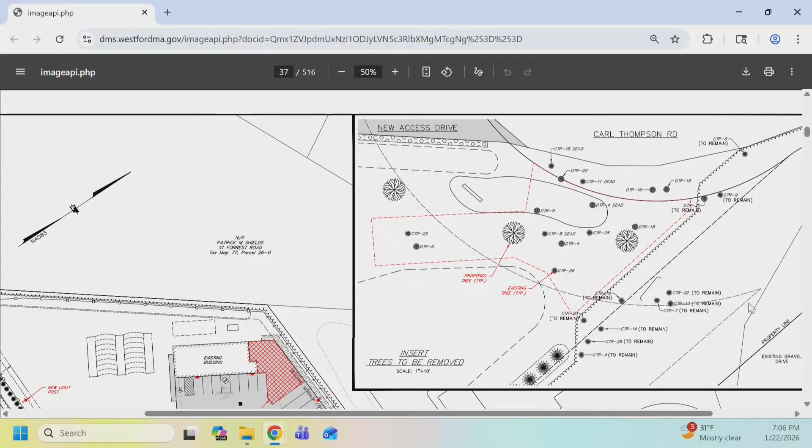The paving, that's just around the building, was more kind of cleanup. We were trying to minimize, being engineers, drawing straight lines, and Sean looked at it and felt that since we were going to have this pavement, he wanted a cleaner site around the building. The parking hasn't changed—the configuration of the line work is what we presented to the board for approval back in December, with parking spaces and how those are utilized. It would just be filling in some of the gaps with paving and gravel, trying to have a somewhat cleaner site around the building.

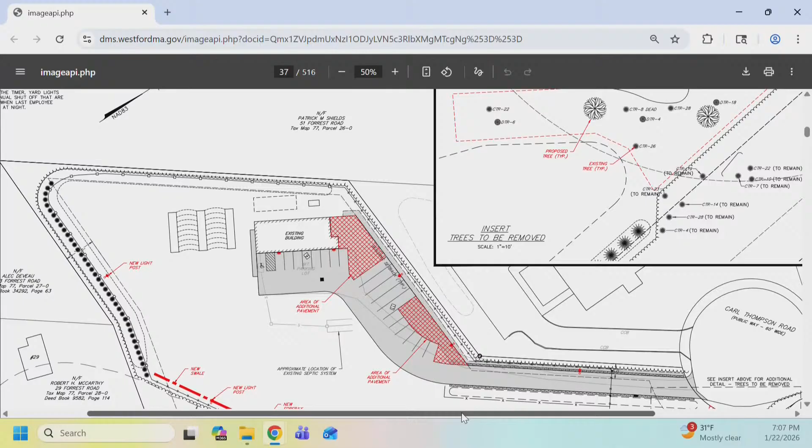The entrance gate—this is really, it was further to the left. If you're looking in the middle where Joe's pointer is going, up the entrance road, that gate used to be about 50 feet to the left, right there. It just shifts to the right, and that gives them the ability to have more yard area inside that gate. It doesn't change the traffic flow—there's still enough room for a vehicle to come off Carl Thompson.

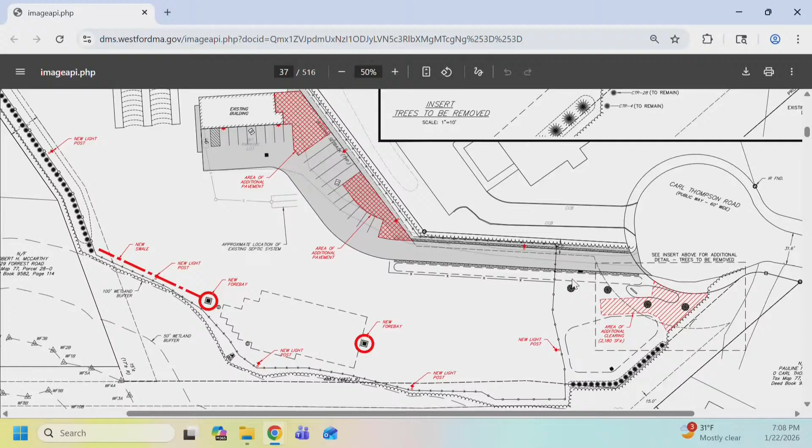There'll be a kiosk. It also lined up the fencing with the automatic slide gate, which was an improvement. Before, the slide gate would go out to kind of an exposed area, and now that gate lines up with the existing fence, which is a better design—it helps protect the gate when it's open so people aren't crashing into it and breaking it.

And lastly, as the chair said, the lighting. Joe, if you want to go to the lighting plan—there was some additional thought, especially once the dark nights set in and Sean started to realize how dark the facility is, thinking about operations. The preference was to add some lighting. We tried to keep it consistent with the approved lighting: downward facing, dark-sky friendly LEDs with a smaller spread, fixed below the light fixture.

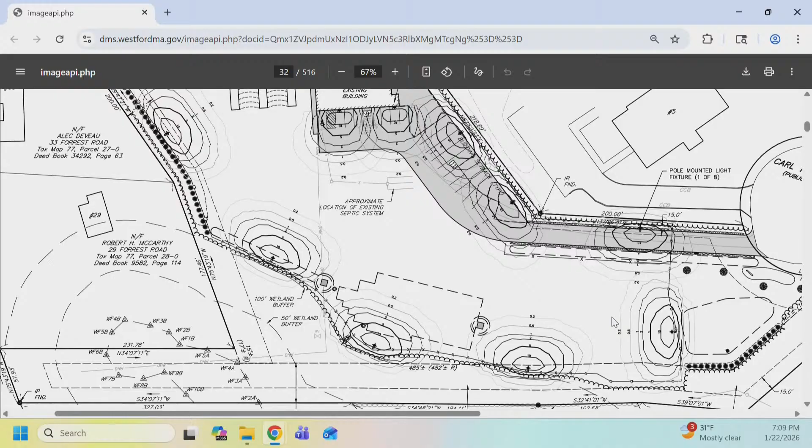You can see there are 5 new egg-shaped, circular lighting contours along that southwesterly limit of clearing—one to the right, and four across the bottom. We tried to keep those spaced out and minimized; we didn't want to put too many, but Sean felt it was important for safety and vehicle movements during that 4 o'clock to 5:30 window, their typical hours.

We also took into account some of the general comments that were raised. All the lighting would be on a timer, only operating from 5:30 a.m. to 8 p.m., Monday through Friday. The automatic timer would shut them off at night at 8 o'clock, but Bob had recommended including a manual shutoff, so if it's not needed, the last person leaving can shut the lights off.

It was a good recommendation. He checked with his electrician, not a problem. They will be able to incorporate that so that we're not leaving the lights on unnecessarily.

They're not there till 8 o'clock, and Sean can certainly talk about his operations. I think the goal was just those occasional nights where they need to have one crew there to load up for the next day, so they do want that option, but typically they are not there that late, so that manual override was a good idea.

The only other comment we had submitted was that we were kind of waiting to get the final review and input from the board before addressing the final engineering comments. We don't have any issues with the engineering comments, and we lightly touched on this at the last meeting, that if the board was to move forward, any approvals include the condition to address the engineering comments. We'd be happy to do that. We have no issues with addressing those comments. It was just a matter of getting through this process first.

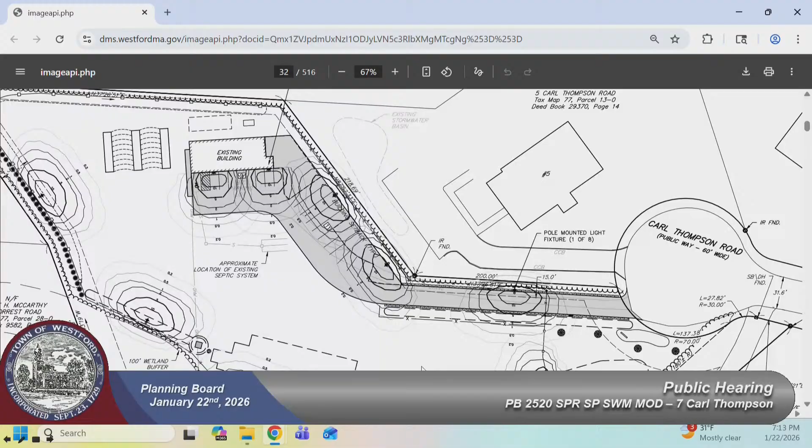And the trees, I appreciate moving the gate to do that, but that is going to open up more of the yard, and those trees are the only buffer right now between the adjacent properties. I was shocked at how close everything really was on that site, between, was it number 5, the adjacent business, the driveway, and the 2 or 3 homes that are shown here.

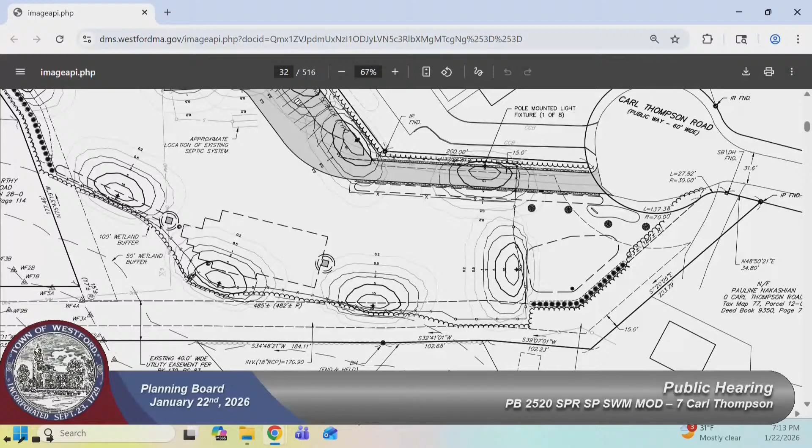So it's going to be really important that the screening be working, and make sure the lights are not too high but have sufficient shades as well. The lights are way set back from the abutters on the side, the house is over here, so there's gonna be a really big front lawn, and the lights are, nothing is facing towards any abutters, it's facing inwards.

As I mentioned last time, it is a small site, and while the closest light will face away, it will be more visible across the site to the adjacent properties. So that all has to be factored in to make sure the aim of the lights is away from all residents, both behind and out in the distance.

So just so I'm clear, those contour lines, that's really where the light's going to go, is that correct? It's the spread of the light in foot candles, the strength and the spread of the light. So obviously the center is brightest, 10-foot candles, and then it goes down to 0.5, 0.2, and 0.1 as you get further from that light fixture. The light fixture is the circle with the crosshairs in the middle of those contours.

What's the planned height for those poles? 14 feet, which allows for a 10-foot pole on a 3 or 4 foot concrete bollard. That's typical for site plans, you have that concrete bollard so cars or vehicles don't hit it.

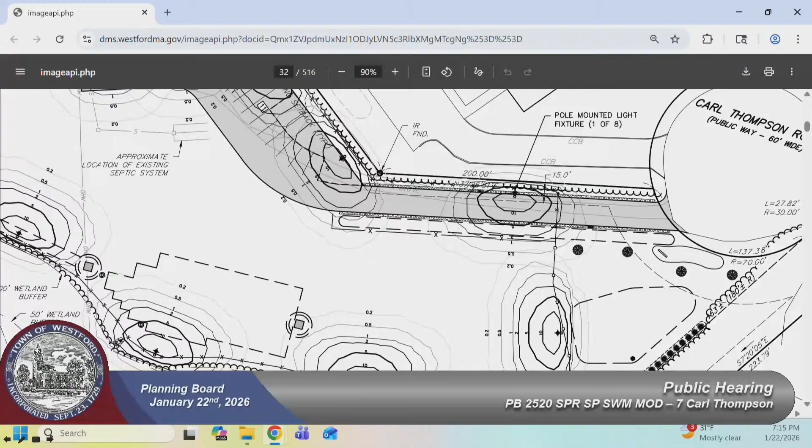Okay, all right, that's John? Okay, so my only question is, you have that really good screening on, let's see, kind of on the easterly side, right there. I guess I was wondering, for that particular light pole, and I know we walked the site, but honestly I don't recall how many of the trees in the tree line are really evergreen.

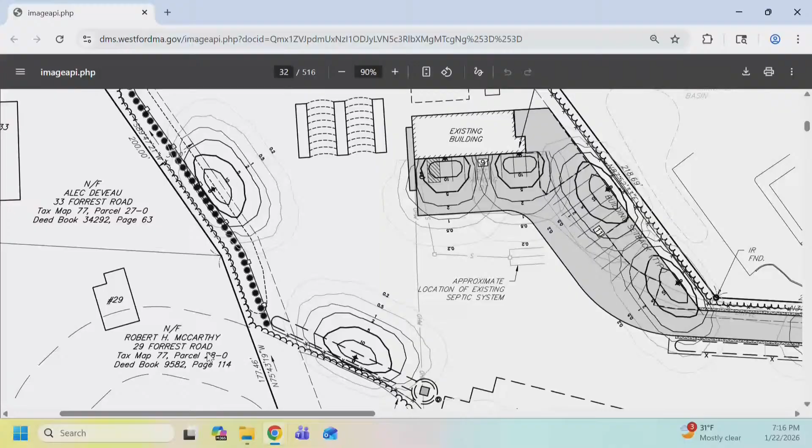If maybe you could get a few more big evergreens in there to kind of buffer, Joe, can you go down a little bit? So you could buffer from number 6, and then the same thing on the other side, buffer from there, so maybe with evergreens you'd get less light, especially at 5:30 in the morning, that's pretty early. I'm just trying to make sure.

No, and I think majority of the trees out there are coniferous, like tall mature pine trees with a mature canopy height of whatever, 60, 70 feet. It is primarily sandy soil where you see those pine species. I know in the past planting something smaller in that canopy, but we could certainly do some sporadic rhododendrons or mountain laurel, that could survive in that shaded area where you could sporadically plant.

Those tend to hold on to their leaves year round, so maybe not an evergreen, but something, or an evergreen, I'm just thinking off the top of my head. Something that's kind of shorter and would fill in those gaps. Yes, that would work too, like rhododendron, we've done that before, so either or, and I know those rhododendrons can get big. Exactly, so we could certainly...

Accommodate that with an updated landscape plan, or we could work with Joe on that. I think it would help fill in some of those gaps. Yeah, if we could just fill some of the gaps a little bit, so that especially at 5:30 in the morning it's a little rough.

Anything else? That's it, thank you. Dylan? Nothing in addition to my colleagues, but we need the applicant to reply to engineering's comments, because there's some stuff in there that warrants discussion, but until we see the applicant's feedback to that, I don't think it makes sense to discuss it. Thanks. Aaron?

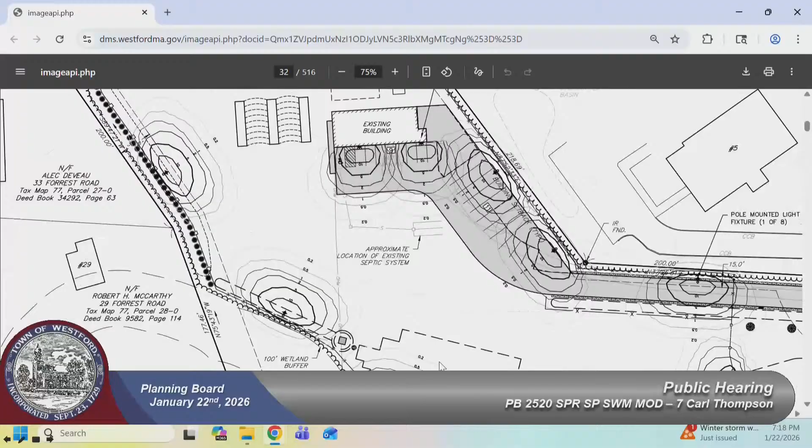What do you think about that? So, I'm trying to think of where you were on there. I'm right behind, exactly behind the existing building, straight up from number 5, I think. Yeah, correct, it would be probably in that area if I had to guess. I think your house is kind of where Joe's scrolling arrow is, and Groton Road is on that northeast side of the plan as we're looking at it.

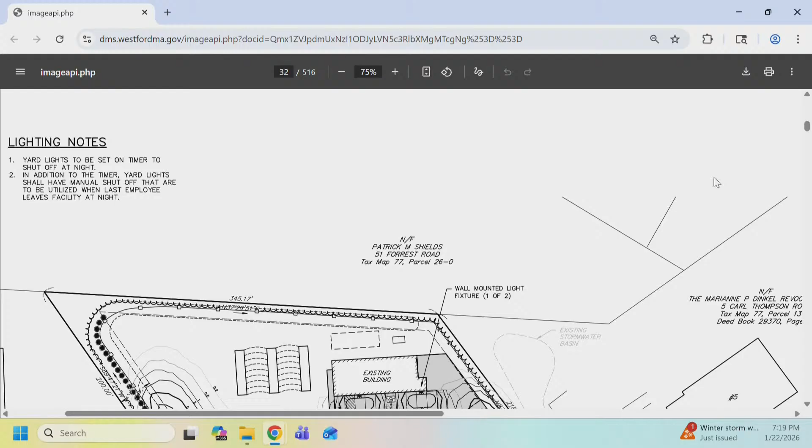All of the lighting that we're talking about adding would be on the south side, and they're all downward facing, dark sky friendly shielded lights, so you won't see the light directly. If I walk in back of my house and walk straight, I'm gonna run right into the back of that building.

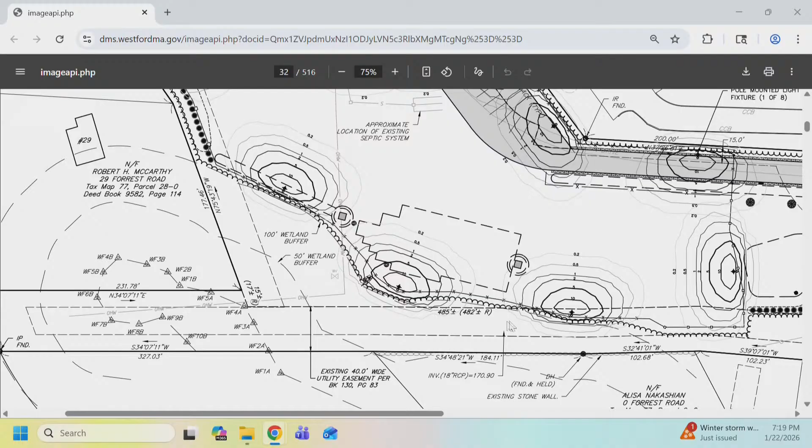So I'm worried about those lights right there, to the right of the building. I don't think there is anything behind the building, but those lights to the left-hand side corner - will those be shining into my house?

They will be facing Groton Road, yes. Those lights are a concern for me, but the intent is that there is a shade on it that limits the throw. That's why I'm asking about the height. It would be 14 feet visible. That's pretty high, isn't it?

It could be much higher. Yeah, it's high enough. Well, that's my concern, so I have to leave it to you people to ease my concern. Are those lights gonna be shining into the back of my house?

So again, sir, if you look at the circles around the light, that shows the intensity. I think if you go out on your back porch, you're probably gonna see a light, but it's not gonna be lighting up your backyard. You should not be able to see the light bulbs, for example.

Yeah, you'll see a light. You should be able to see the light dispersion on the ground and the trees. But we're hoping that there is not a direct line from your line of sight to the light bulb, because the light shade should be preventing that.

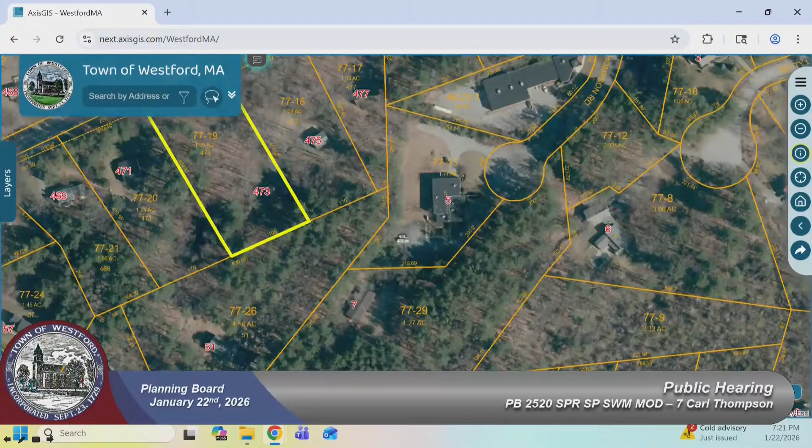Yeah, I think I am too, and I like the idea about the automatic timer, that's great, I appreciate that, and people leaving and shutting the lights off. If that's what's gonna happen consistently, that would be great. But in addition, the automatic timer would take it up to 8 PM every night.

We've asked that they put a manual override on, because in talking with them at the last meeting, 6:30 is probably a typical time for them to leave the yard, and that would turn it off. So the manual override is a safety measure, so it doesn't go any later than that unnecessarily.

I think also that storage corral is gonna be between your house and that light as well, so that's gonna probably block some of that too.

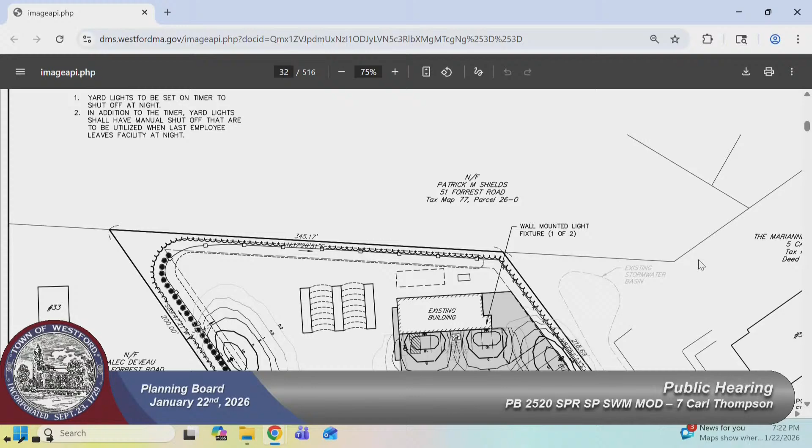Could you go back, Joe, to the lighting plan diagram? So the last ring you see there, the furthest one out from the light pole, is 0.2 foot candles. I looked it up - 0.2 foot candles is apparently the light of a dimly lit hallway or a moonlit night. So in theory, at that distance, it should be as bright as a dimly lit hallway or a moonlit night.

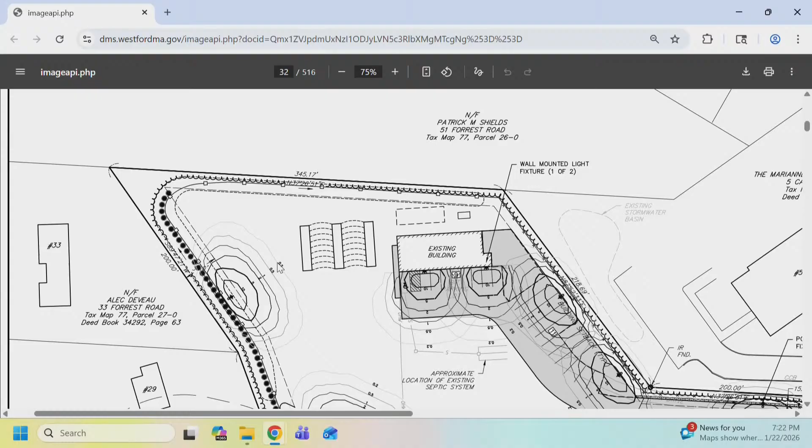So one thing we might want to do is get engineering's opinion on visibility, if they have expertise in that area. I certainly don't think it's something that would be beaming into your house, but I do think you'll obviously see it from your backyard. If you look right at it, you would see it.

What they're gonna see is the bright light at the base of the pole, like a flashlight. It's not gonna spread light illuminating his backyard, but they are going to see bright spots on the ground, depending on their vantage point to the ground.

Okay. All right, thank you. Yep.

Anybody else in the audience?

I have a few questions, if you don't mind. We've been using that back driveway for 34 years nonstop. So I wanted to know, are you envisioning any changes to our using it to get to our garage? No, I'm not envisioning any changes.

I think the site, I don't mean to interrupt, chair do you mind if I respond directly? Please do. We did leave that as to remain, and I think what we talked about with the 2024 approvals was putting in that berm to keep drainage intended to stay in Carl Thompson from going down into your driveway. Very good, thank you for saying all that, because I remember her saying that and just wanted to confirm it. Thank you. So that is still shown on the approved site plan for this project and modification. So there were no changes.

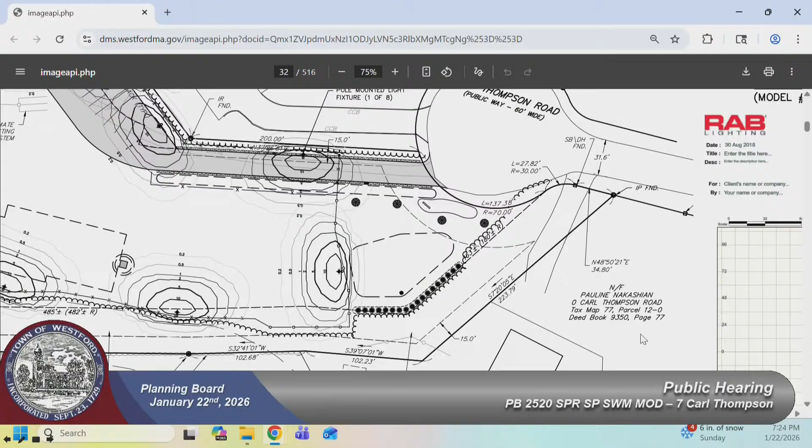Since I'm not an attorney and don't do what you guys do, it's not clear to me how this plan and the other one with the big building from one end to the other coexist. So I don't see that on this map, on these pictures. Am I missing something, or is it here? What was the question? The other large building that's going from one end to the other. That's gone, it's gone.

So we're just doing fences? Yeah. Oh, you guys are great. And we're keeping the existing building there and just rehabbing it. Perfect, it's a lovely building, that garage in there is really nice.

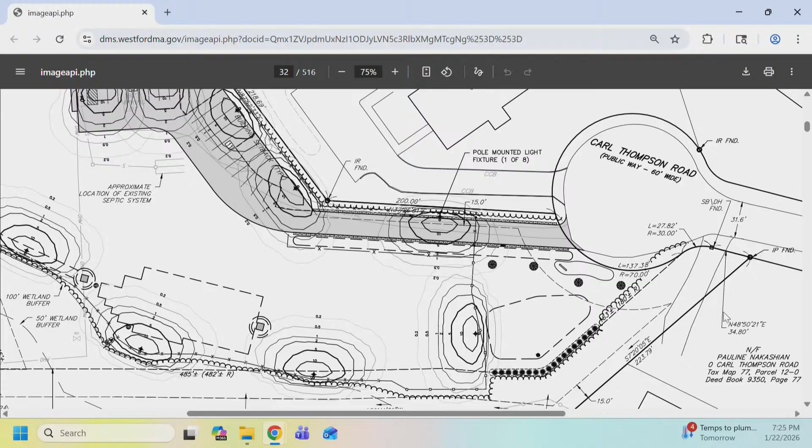Okay, so you're talking about taking out some trees, and I saw some comments in the packet about having to have hearings for trees or whatever. I don't know what side of that berm, looking at the diagram, is on, but there's an awfully tall tree that's pretty close to our garage. If you're gonna be in there doing anything, could we get rid of that? Because I'm always worried about that thing toppling over and taking out our garage.

We could certainly, if the board has no problems with it, and I know Joe has all the hay bales and everything kind of marked, so it's easy to find your way out there right now. We could certainly meet with you and Joe and just mark that tree. We can't touch it because technically it's not on our property, but at the same time, I just look at it and I'm like...

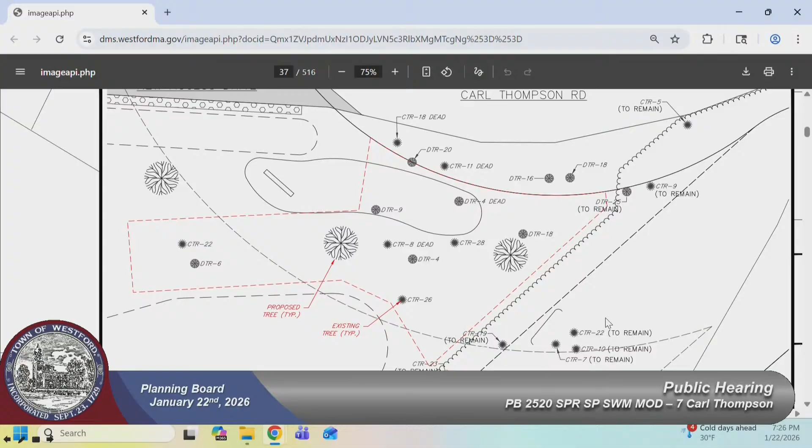Yeah, a lot of those trees fall on that kind of rock berm that's there, that was, I think, put in when they installed the water line. And those trees that you see on that line, where we shifted our tree line, a lot of those fall on that line. So if I had to guess, that tree would be one of them. Let's take a look at it. Okay, alright, that would make me feel better.

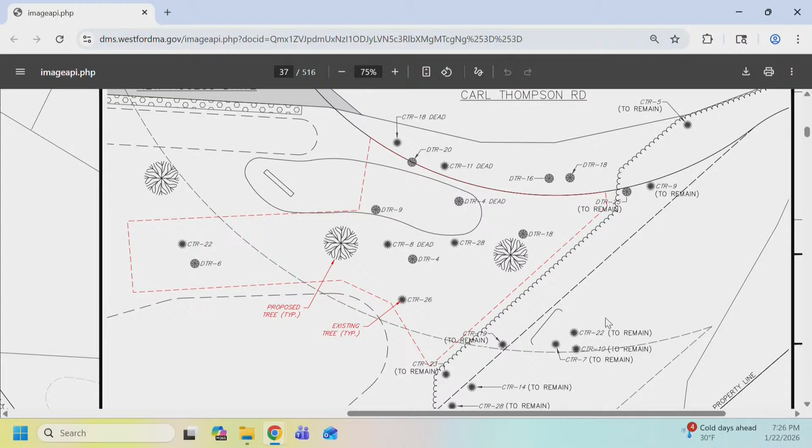Now, so the other plan that was approved, even though that building's not going in, does it still apply or no? Because there's been another one since then. I gotta keep up. Okay, so we talked about arborvitae plantings at that line so there would be coverage in the winter too. Is that still in play? If not, can we make sure it is?

Yep, no, and again chair, if you don't mind, please do. The landscaping plan that was approved for that original larger 25,000 square foot building, all of those elements were kept on this plan or improved upon, not by your property at 6 Betty, but in the southwest corner. There were some additional plantings put in place. And then they're a fence company, so...

You answered the next question I was going to ask, because I don't want to consider just myself, I want to consider my neighbors too. So if you're going to do that, all around you can see those plantings along that westerly end. Excellent, okay. And there's a fence that goes in, and I believe one of the neighbors also just put in a fence, so there'll be a kind of no-touch zone. There'll be a fence, then some plantings, then another fence. Okay.

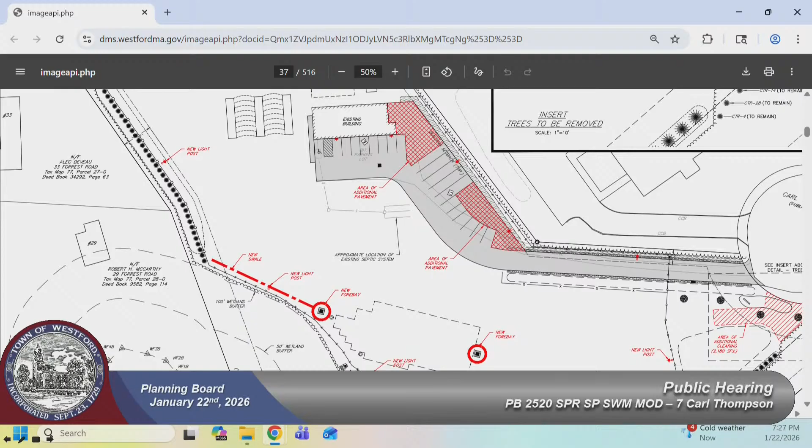Yeah, it's like a demilitarized zone. The squirrels will hang out there, some fox, whatever, deer, that's great.

I apologize, like I said, it's been 30-something years since I've been here and I don't remember. Haystack, didn't Westford ever have intention to keep lighting down low so it wouldn't impact them up there? Am I wrong about that?

We have a gentleman's agreement between the town and MIT Haystack to limit light pollution. That's always been a factor in our master plan for, I don't know, 20-plus years that I've been involved with. That's been a factor in every development in terms of using shading that throws the light downward as opposed to allowing it to go skyward.

I see, this is the lighting that we've been requesting people to use. So the reason why I ask is the other business that's on Carl Thompson, he's been a wonderful neighbor, worked with us and everything. But the lights went up and it beams right into my daughter's window.

It was awful. And he said, I don't get it, we spent money on purpose to make sure it wouldn't be a problem, and yet they go on at night and the bedroom lights up. It's awful. And we're talking like 200-300 feet away, it's a ways.

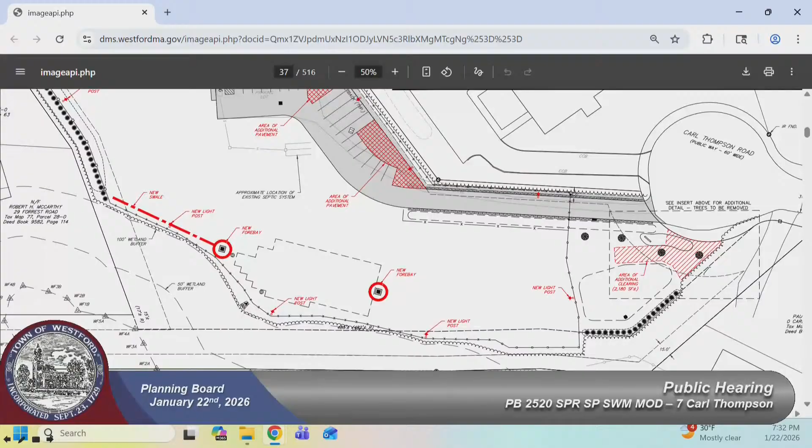So I did show that because I knew that was one of his critical path comments. You can see it on this plan, that red line - that's the grass swale. We didn't address all of the engineering comments, so they were going to wait until all of them were addressed. So we did address that on the plan by showing that we would be incorporating that swale back into the plan, and that is provided in this plan set.

I did talk to them and they were appreciative of that, but then they had more questions about what was done and what wasn't done on their comment letter.

I guess my question, Mr. Chair, is that there's still back and forth between the applicant and engineering. Do we want to close this fully, or do we want to see the back and forth and the resolution of engineering's comments before we close?

If I could make a suggestion - we could always draft a decision for your next meeting in a week and a half. That could give the applicant an opportunity to resolve any outstanding engineering comments, or we could craft them as conditions of approval within the decision letter. You all could review that, and the applicant can have a chance to review it as well. We could do that for the February 2nd meeting, where you just review the decision, if you'd like that.

In my opinion, I'm comfortable so long as we're not going to sign a decision unless engineering signs off on it. So I'm comfortable moving forward, letting them work on it. If there's an issue, then we'll have to come back. Okay, that make sense? It's fine.

We've closed the public hearing, but I understand that - not speaking to the public hearing, just speaking to the procedure - if there's continual conversation going on with engineering, I don't expect any issues, but I would like to make sure the public's aware of that content. And if that would warrant the community saying, could you please reopen the public hearing so we could comment on it, that should be a possibility, if that conversation's still ongoing.

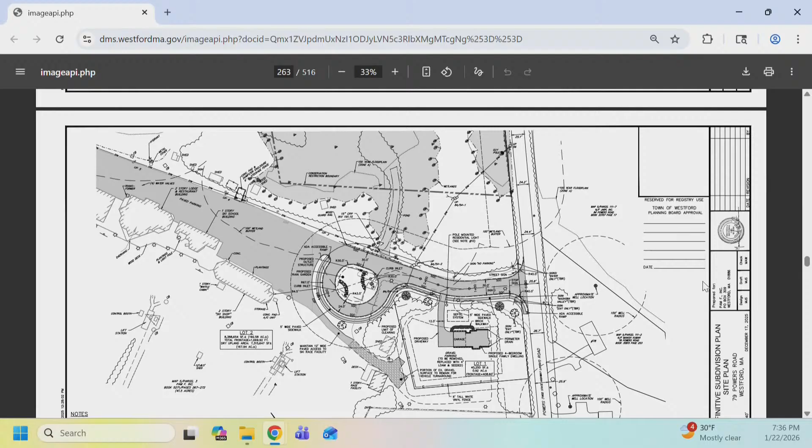There was a question in the staff report about the status of the road, should we ever build this, which is not the intention, but the roadway would be private. As the staff report also indicates, this is the second step in a 2-part process to secure zoning protections for the property. We've also applied for the required stormwater management application as part of the definitive subdivision application.

We're seeking 0 waivers as part of the definitive subdivision application. Any zoning issues raised with existing structures on the site, if this project were ever to be built, which is not the intention, would be addressed and could be conditioned as part of the definitive subdivision approval. Even though it's not the intention to construct this plan, we still need to go through the complete process and engineering.

We would ask that this be sent to engineering for review, not just for the definitive subdivision to make sure we're in conformance with the plans, but also to ensure we're in compliance with your stormwater regulations. So we'd ask the board send that out to engineering, and we'll listen to any comments the board has this evening. Thank you.

Bob? No, I really have no comment. I was astonished at how many pages it took to document what is basically almost a fictitious development exercise to protect zoning. But I was also impressed by the thoroughness of the package, and the fact that it does document the generation of 10 vehicle trips a day out on Powers Road.

Joni? Yeah, I hear what Bob said. It's a great package, but just to freeze zoning is great. Dylan? No comments or questions. Darren? Nope, given the detail, all set.

I'll open it up to the audience. Any comments? I did have one comment from Matt Waterman, I think. Whoever did the ladder apparatus turning diagram, I was a little confused by the path of the bumper and the front and rear wheel. I think they got reversed somehow. We can certainly check that. I know sometimes they're in our plan set, and sometimes they're in our supplemental data report under the traffic section. I can't remember where we put that, but we could certainly check.

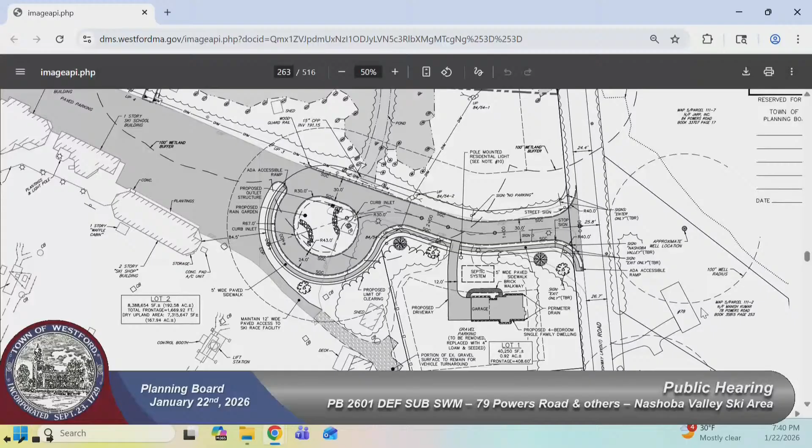Correct. The only other thing I want to raise is I grew up in this 300-year-old house, and out in that field are endangered yellow spotted and blue spotted lizards. These past several years I've been restoring this old house, and the lizards have come into my house. I know there still are at least the yellow ones, I haven't seen a blue spotted one in a couple years. I just want to raise that, since I know everything in that neighborhood is being developed and the animals have nowhere to go. I would hope we can keep some of that land, because they're endangered. Great, thank you.

Anyone else? Hello, my name is Dave Greenwood. I am not a Westford resident. I am the union president for the Westford firefighters. I have a few questions for the planning board, not specifically on this project but on projects in general, and I wasn't sure the right form or mechanism to reach out to you guys. So what you could do is talk to Mr. Jenowitz after the meeting, and we can get it added as a discussion item on a future agenda. Okay, so that would be the plan, we'd have to schedule it on an agenda. Okay, I will work on that with him.

And my only other ask is, would the board consider issuing a moratorium on new construction in Westford until such time as the town planner, town manager, and select board can meet and come up with a plan to address public safety deficiencies, needs, and concerns? Again, I think that would be a discussion item you could bring before us and get it on the agenda. All right, thank you, appreciate your time.